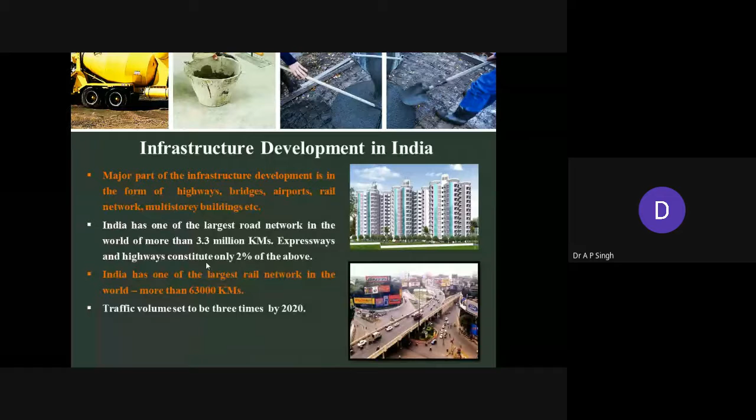India has one of the largest rail networks in the world, more than 63,000 kilometers, and still more work is to be done. Traffic volume is set to be trebling in the coming years, up to beyond 2020.

Now we need to bridge infrastructure gaps to sustain economic growth. In infrastructure development, concrete is the predominant construction material, the other being steel. But still steel is lesser used, and we have more concrete, more reinforced concrete elements in buildings. A major share of the infrastructure development is in the form of concrete structures.

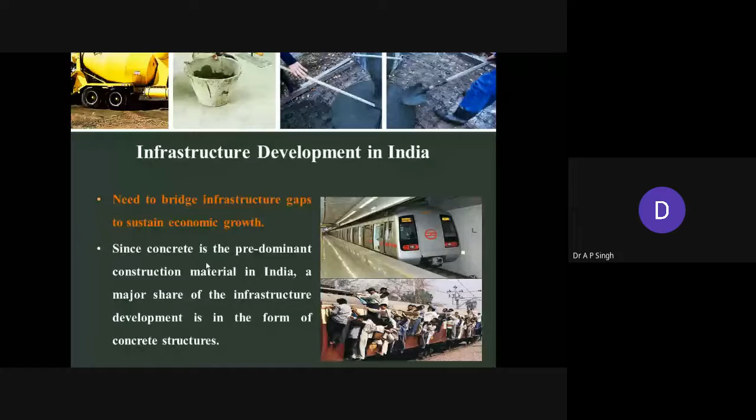Construction industry in India constitutes around 40 to 50% of the capital expenditure in India on projects in various sectors. The total size of Indian construction industry is estimated to be 50,000 million USD and is growing at an annual rate of 7 to 8%, which is expected to pick up.

India has the second largest construction industry in Asia after China, and still more progress is expected after this pandemic, and some major activity is likely to be shifted to India. For that, more infrastructure projects will be coming up. Over 40,000 construction companies are registered with construction industry associations across the country. Construction industry has mainly small contractors, companies, and a few large corporates.

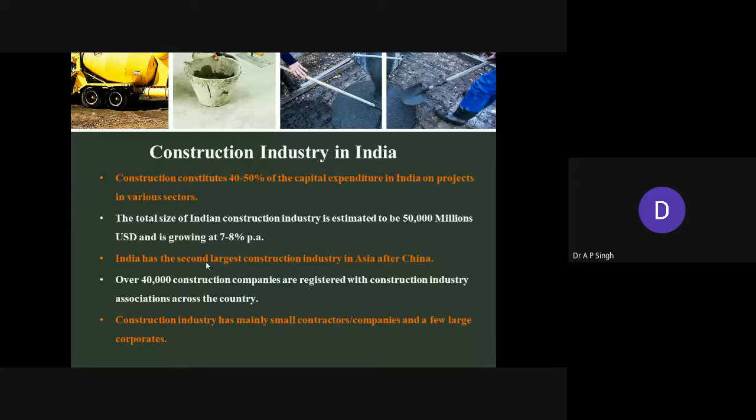Concrete is the world's most versatile, durable, and reliable construction material. It is the most widely used construction material because structural steel construction is relatively expensive.

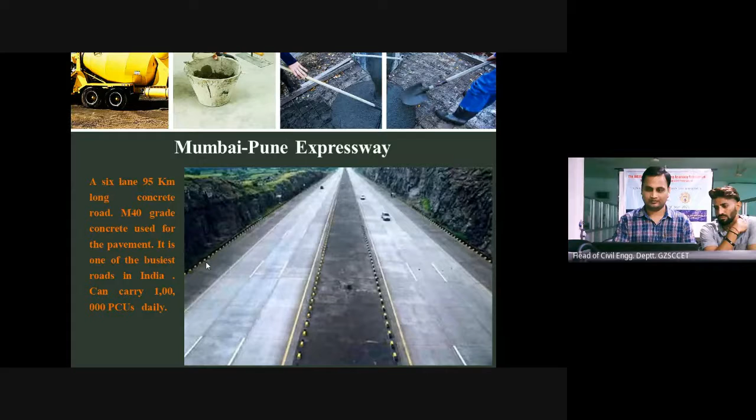This is a 95-kilometer long concrete road. It passes through plain as well as hilly terrain and many tunnels. It's one of the busiest roads in India and has a capacity of carrying up to 1 lakh passenger car units daily. Presently, it is carrying around 50,000 passenger car units daily.

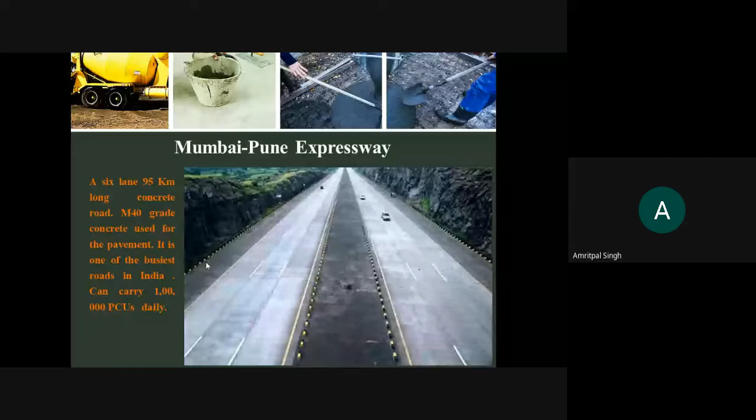Another one is the Exhibition Center in National Academy of Construction, Hyderabad.

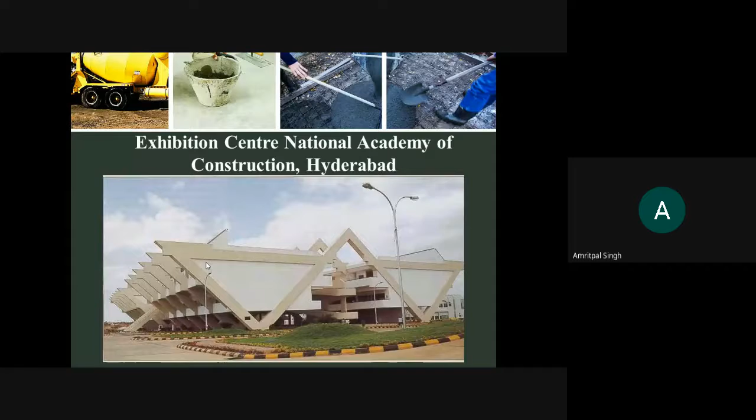Now, when we are talking of self-compacted concrete, I'll just try to define the compaction of concrete, and what is self-compacted concrete, and why do we need self-compacted concrete.

The first slide is on compaction of concrete. Compaction of concrete can be defined as the process of elimination of entrapped air from freshly placed concrete. This results in significant increase in strength and durability, two of the most important aspects considered for concrete.

If the concrete is not well compacted, it leads to porous and segregated concrete, and a lot of air is entrapped in it. It has been established by research that a mere 10% entrapped air results in a 50% reduction in the strength of concrete as compared to that of fully compacted concrete.

Compaction, in addition to increasing the strength, also leads to better even distribution of pores, which will lead to reduced permeability.

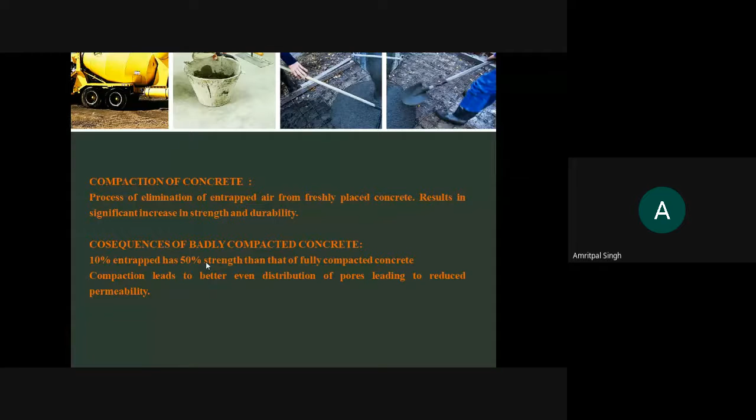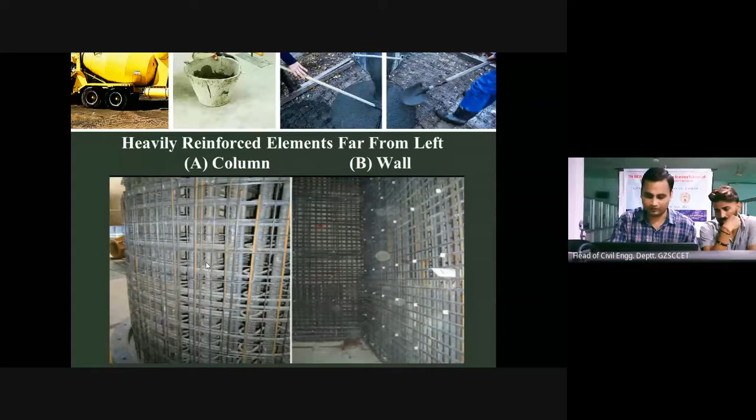Sir, better stop and rejoin again. There was a problem in the net, it's getting obstructed again and again. I'm sorry for that, but I'll rejoin as soon as possible and go ahead with this. Okay sir, you can proceed. I'm sorry the net is getting obstructed again and I have to rejoin every time, but I'll be doing it, and I regret the inconvenience. But it's like that.

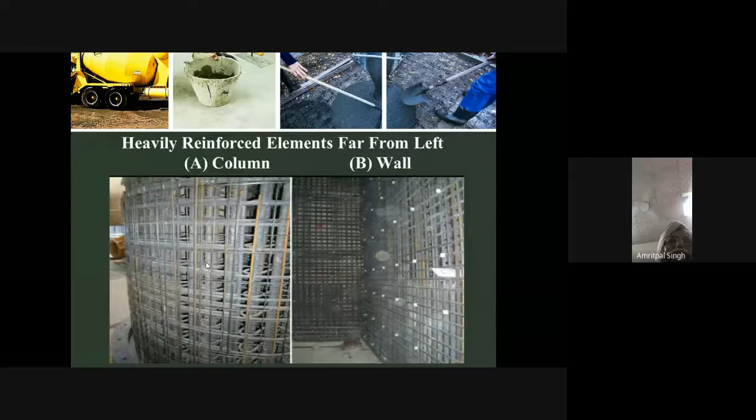Now, the necessity of self-compacting concrete: we need it because in columns, joints, or places where high strength is required, compaction is not possible. Otherwise, vibration leads to excessive vibration, which also leads to some problems. So we go in for a concrete which compacts itself under its own weight.

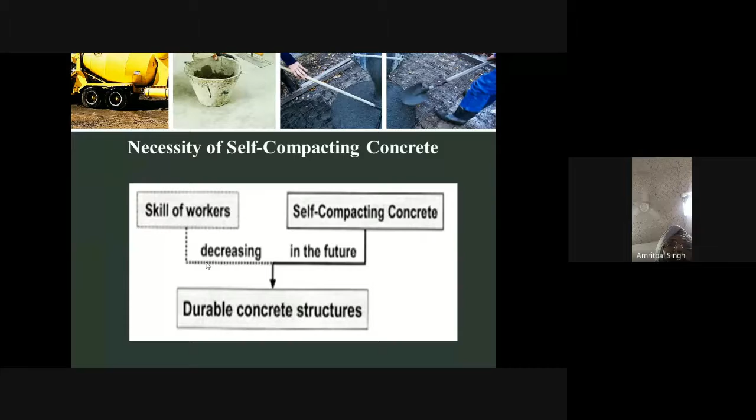Now, self-compacting concrete is a new specialized concrete. It compacts under its own weight and fills all the corners of the formwork, even in congested reinforcement areas like in shear walls and in joints of beam columns.

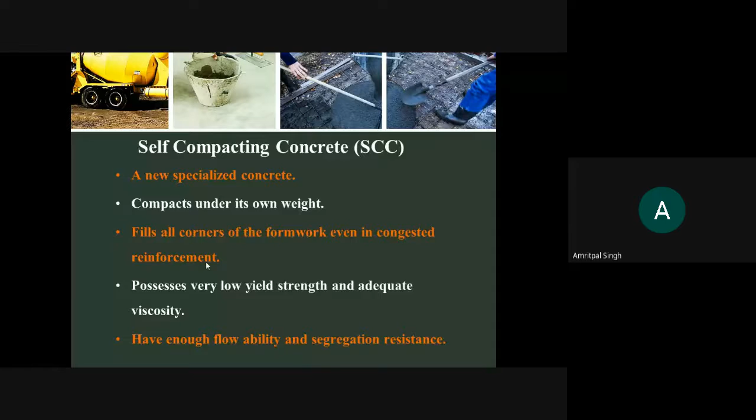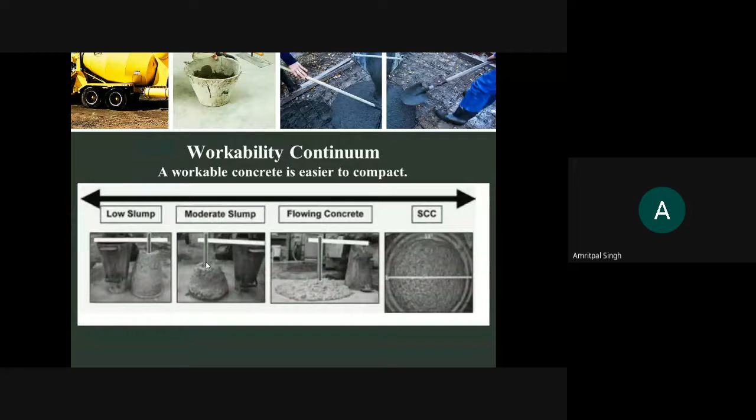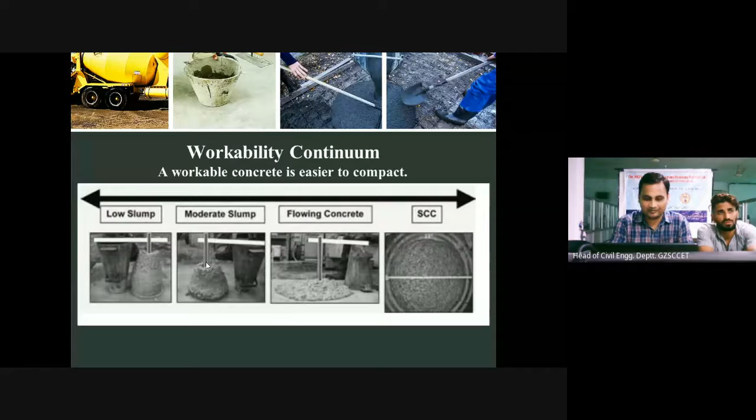Again sir, voice is not audible. Sir, your voice is not audible to the audience.

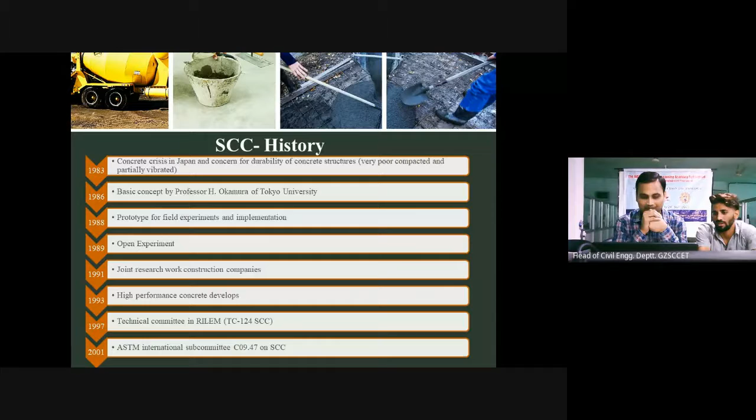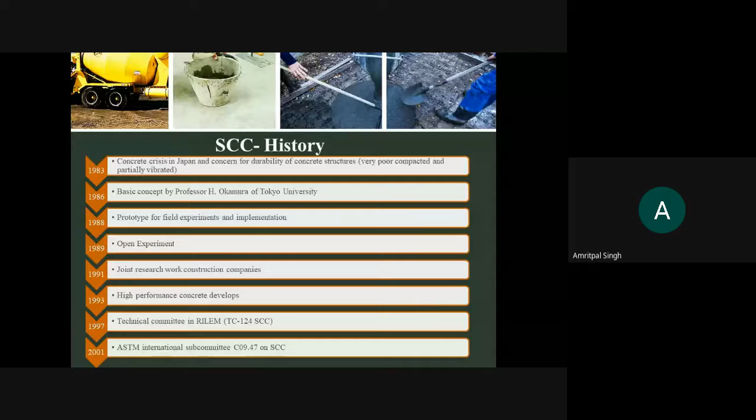In 1983, concern arose for durability of concrete structures that were very poorly compacted and partially vibrated. Then Professor H. Okamura of Tokyo University developed the basic concept. In 1988, prototypes were made for field experiments and implementation. In 1989, open experiments took place. In 1991, joint research work was done with construction companies. Then various developments took place in the years 1993, 1997, 2001, and so on, still carrying on in this field.

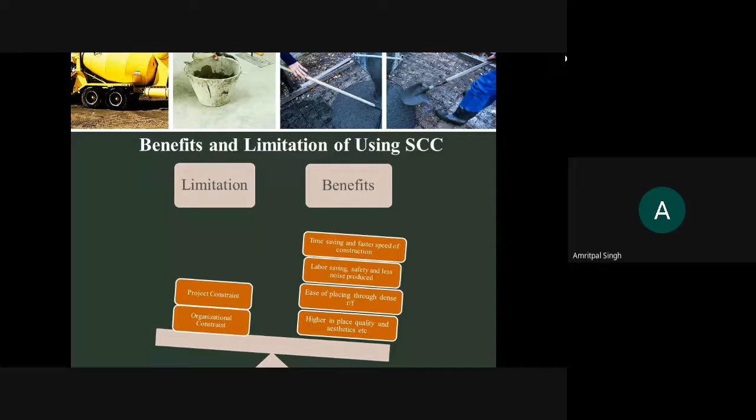Similarly in structures like sport stadia, lecture halls, or cinemas where we have rising seats, this problem of flowability of SCC creates problems. We also have organizational constraints which concern the concrete producer and the contractor, and lack of skilled labor is one constraint.

Then proportioning of material: ordinary concrete versus self-compacting concrete. In ordinary concrete, we have cement, sand, gravel, water, and plasticizer.

In SCC, in addition to cement, sand, gravel, and water, we also need chemical admixtures like fly ash, rice husk ash, or silica fume, and we need plasticizers and thickeners. That is the difference between proportioning of material for ordinary concrete and self-compacting concrete.

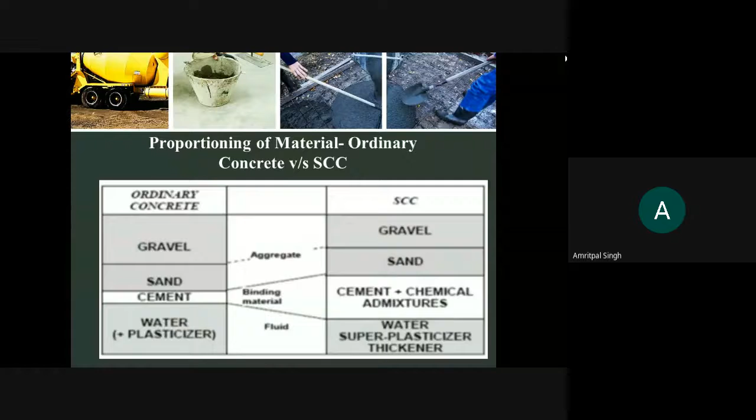In self-compacting concrete, the requirements are: high volume of paste, high volume of fines lesser than 80 microns, high doses of super plasticizer, use of viscosity modifying agents, lesser coarse aggregate, and we need admixtures.

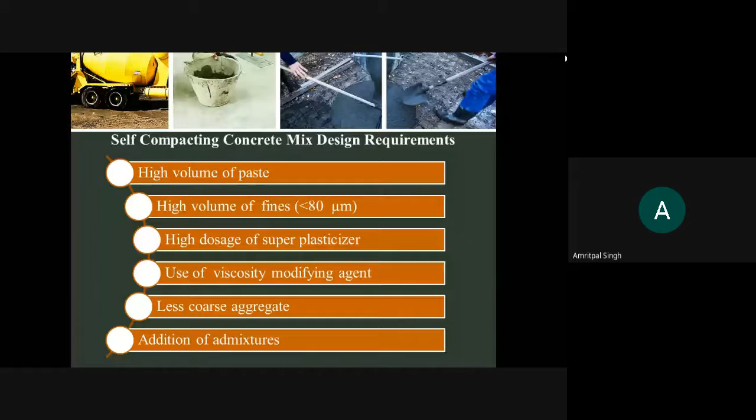The mechanism of achieving self-compaction: reduction of water to binder ratio, limitation of coarse aggregate and its maximum size, addition of mineral admixture, use of super plasticizer and VMA.

The addition of mineral admixture and use of super plasticizer leads to high deformability of mortar and concrete. The first three—reduction of water to binder ratio, limitation and reduction in quantity of coarse aggregates, and limiting its maximum size, and addition of...

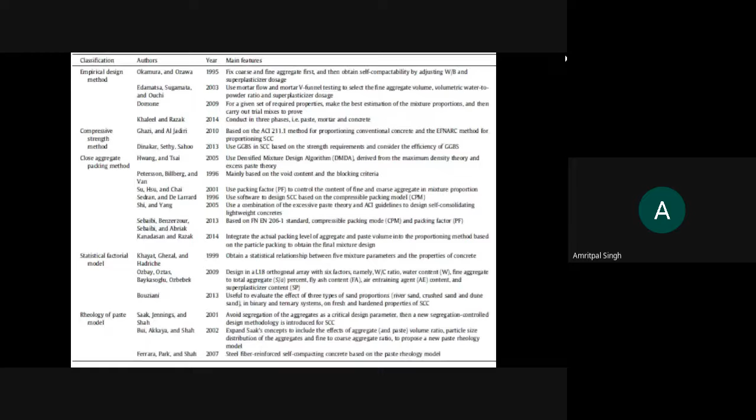Sir, again you are not audible. Hello sir. AP Singh sir ji, you are not audible.

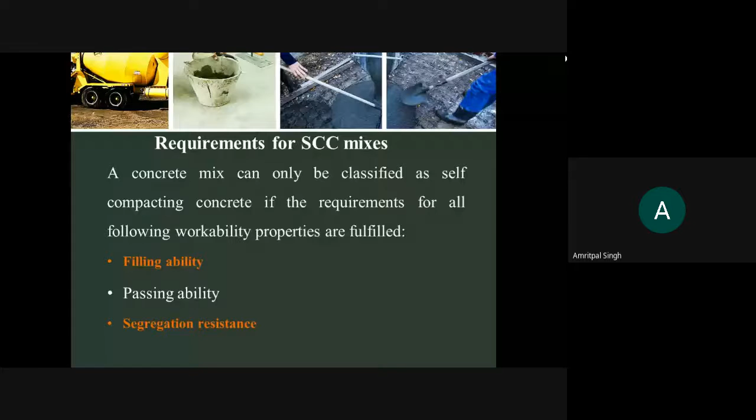Sir, again you are not audible. Sir, please check your connection.

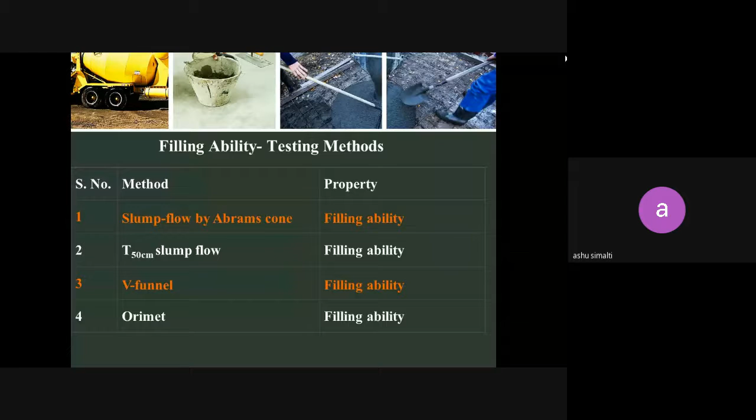Which we use for filling ability. I'm speaking from another mobile. First is slump flow by Abrams cone, T50 slump flow, V funnel method, and Orimet method. These are the four methods which are used for testing the filling ability of the self-compacted concrete.

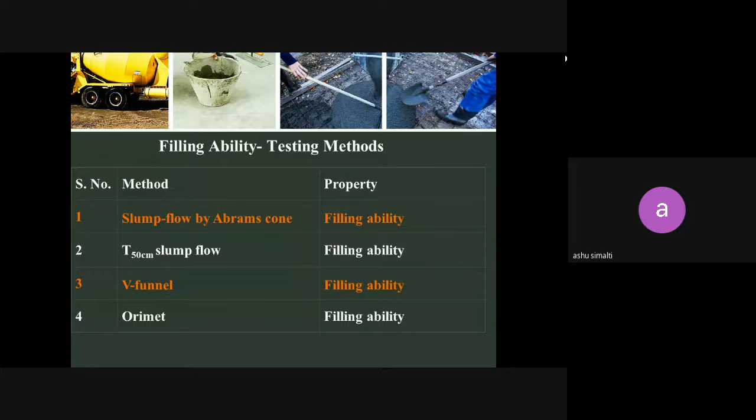Slump flow by Abrams cone and T50 centimeter.

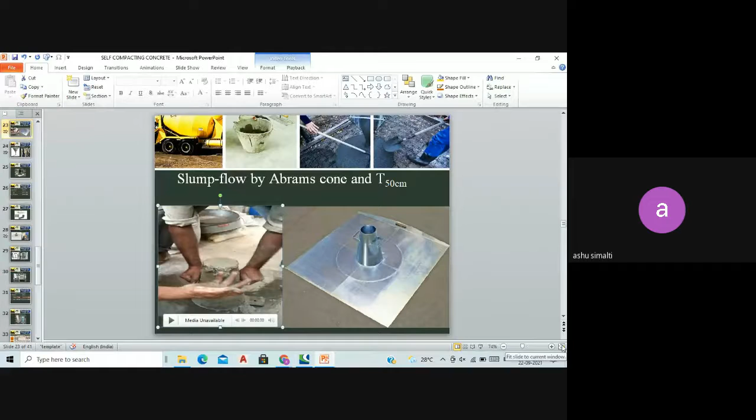This is a cone which is filled with concrete, and we lift it up, and we have a circle of 500 diameter, and it has to spread over this circle, and the time taken to spread over this circle of 500 diameter is known as T50 centimeter or T500 time, and it should pass the limits prescribed to be classified as a self-compacting concrete.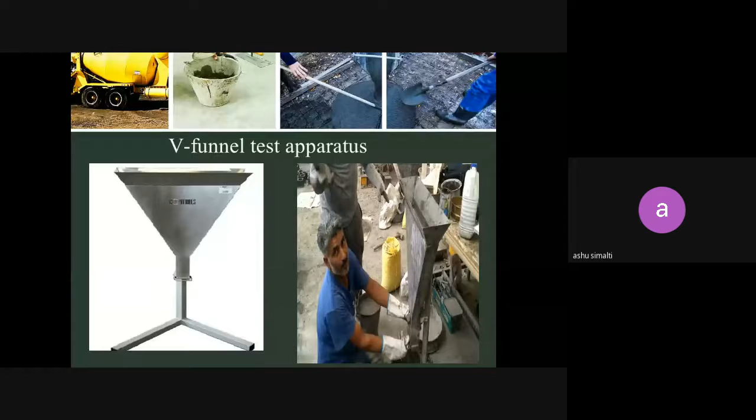This is the third test, that's Orimet test, and as the figure shows, it's self-explanatory. It's filled from the top, and the gate is open. It is kept there for... okay.

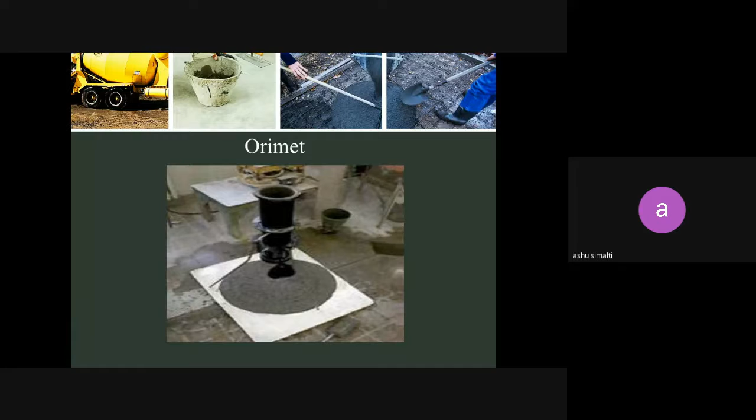Then we have got passing ability testing methods. There are four methods: J ring, L box, U box, and fill box test.

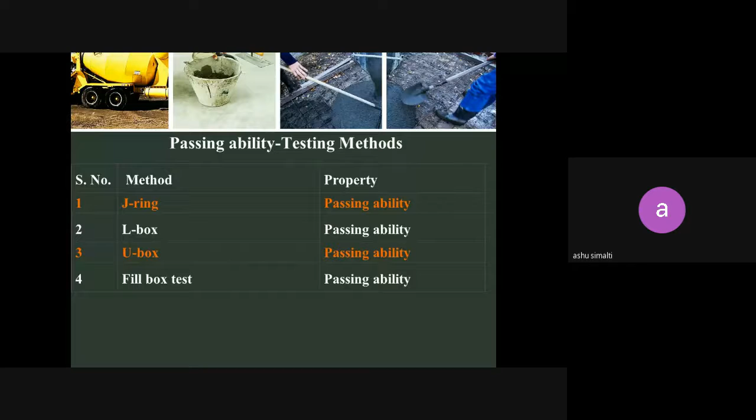This is the L box test, and we fill the concrete in the box, and it flows, and then we determine and measure the heights H1 and H2. The ratio of height H2 to H1 should be less than 1.

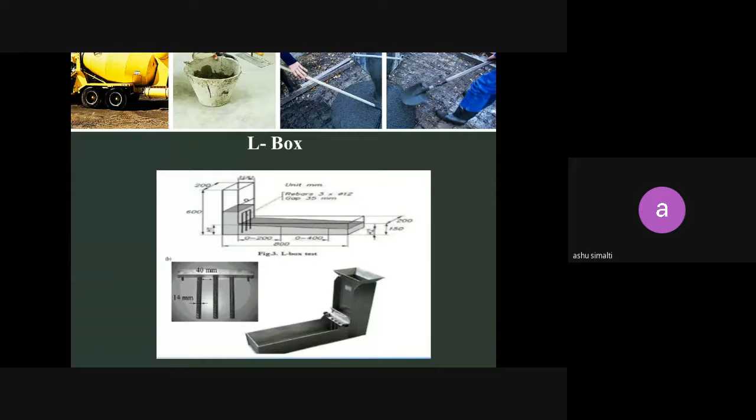This is the J ring test. Again, these are all filling flowability tests, and we fill the concrete and remove the cone, and then we see the spread, measure the time, and see the distance to which they can go.

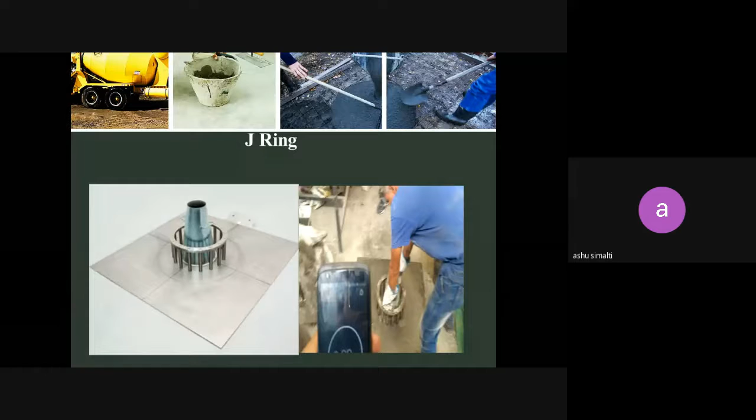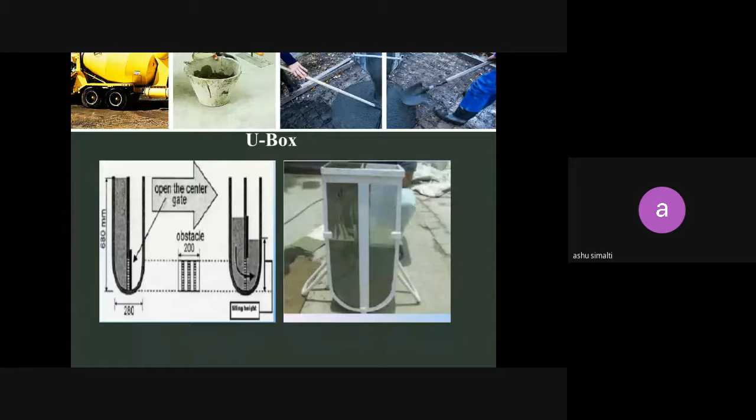This is the U box, and this is the U box test, and the next is the fill box test.

Then we have got the third, stability testing methods, which test whether the mix is segregating or bleeding. We have got column segregation test. We have got V funnel at 5 minutes test. We have got GTM screen stability test, and we have got visual stability index.

This is the column segregation test.

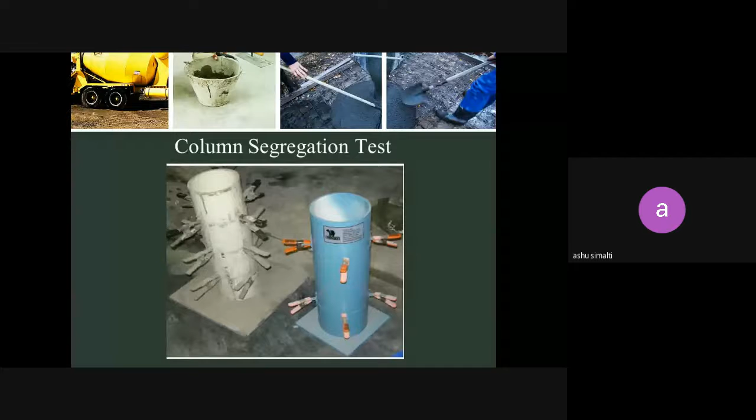V funnel test, we have already seen earlier. There the concrete is put in the funnel and kept there for 5 minutes, and then we let it flow and see whether the aggregates have segregated or not.

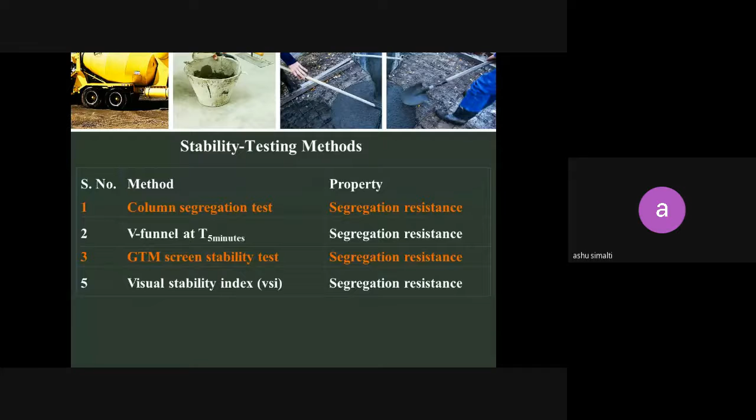Now, influence of material characteristics and proportioning on fresh properties. Number one is powder, filling ability. Powder, that is the binding material, how it affects the filling ability, passing ability, and stability. Powder binding material gives packing density; particle shape and reactivity of powder combination used can impact the water or admixture demand.

Minimal to no impact on passing ability, and fineness of the powder will impact bleeding characterization and viscosity. Viscosity level will affect aggregate settlement.

Then we have the second constituent, that is the aggregate. Optimum packing density and more rounded particles will increase the filling ability. More angular particle shape will reduce the ability of concrete particles to rearrange their relative position while flowing through a restricted space, whereas smaller particles will flow through the spaces more easily. Smaller particles will have lower tendency to settle and segregate. Higher fine content will reduce segregation and bleeding. High range water reducer increases the flowability of the paste fraction of the concrete mix.

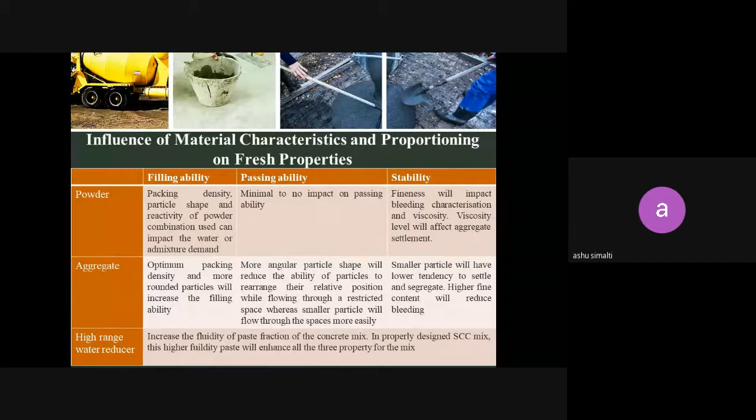In a properly designed SCC mix, the higher fluidity paste will enhance all three properties of the mix. Within a reasonable water powder range, an increase in powder content will increase the paste volume and paste viscosity, enhancing the filling ability, passing ability, and stability of an SCC mixture.

Too great an increase in powder without an increase in water can lead to mixtures with viscosities that are too high, resulting in reduced filling and passing abilities.

Too high an aggregate volume relative to the paste volume will decrease filling ability. Too high a concentration of larger particle sizes will cause blocking and reduce passing ability. The concentration is governed by the particle size distribution and mixture proportions together. Higher fine aggregate contents will reduce bleeding and aggregate settlement.

With high range water reducers, the increased water increases the paste volume and the filling ability, as long as no segregation is occurring. In some instances, increase in water can increase the passing ability by improving the filling ability. Too high a level of water can increase bleed and instability.

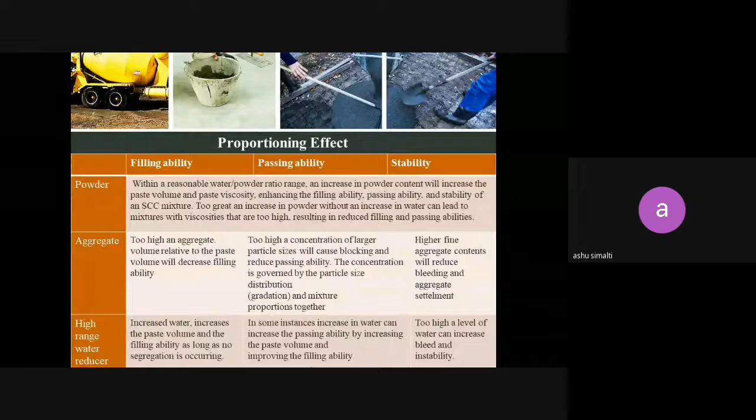This just shows a flow diagram: cement added, mineral additions, fine aggregate, coarse aggregate, dry mixing for 5 seconds. Then we add water, mixing for 2 minutes, followed by a pause of 1 minute for false set. Then we add super plasticizer.

Again mixing for 2 minutes, measurement of slump flow, then remixing, addition of VMA, then remixing. Then we perform all the tests which we have just discussed: slump flow, V funnel, U box, L box, fill box test, etc., and other stability tests. If it qualifies all these, then we say it's self-compacting. If it fails even one of these tests, it will cause remixing and then adjustments, and repeating the procedure all over again.

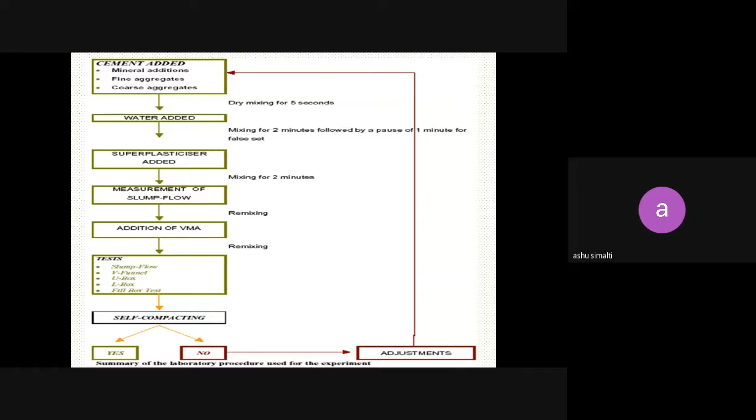These are the limits prescribed by different codes for those test values. Slump flow by Abrams cone: minimum unit is mm, minimum 650, maximum 800. T50 centimeter slump flow measured in seconds: minimum 2 seconds, maximum 5.

J ring, again in mm, minimum 0, maximum 10. If it exceeds 10, it has to be repeated. V funnel, again in seconds, minimum 6, maximum 12. V funnel at 5 minutes, 0 to 3. L box, H2 by H1, 0.8 minimum and 1 maximum; more than 1, again repetition.

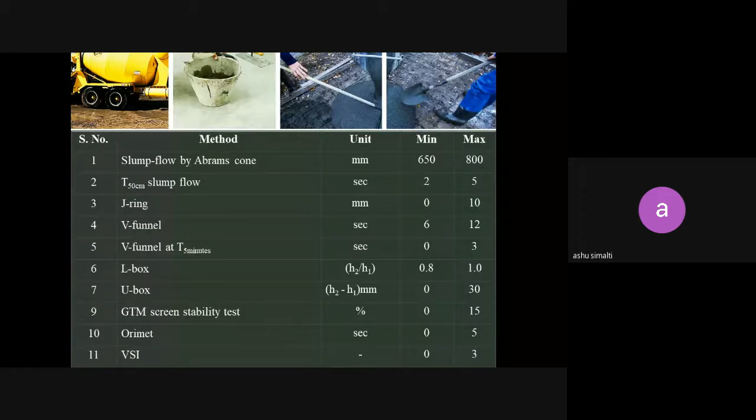U box, H2 minus H1 is 0 to 30. GTM screen, 0 to 15. Orimet, 0 to 5 seconds. And visual stability index is normally 0, 1, 2, 3.

This graph shows the market in billions of US dollars in year 2021 in the different parts of the world: Latin America, North America, Europe, Asia Pacific, Middle East, and Africa. A lot of development is occurring in Middle East, Africa, and Asia Pacific, so the consumption there is more, and it is increasing at a rate of around 6%.

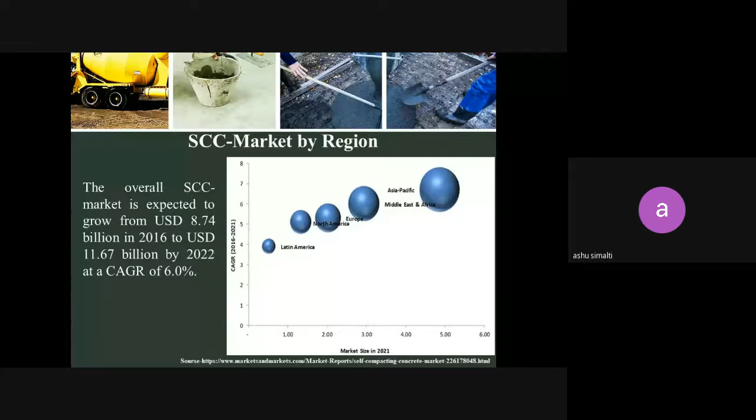Then we have got some special self-compacting concretes like high strength self-compacting concrete and, for special applications, lightweight self-compacting concrete, heavyweight self-compacting concrete. Steel fiber reinforced concrete is also becoming very popular, and now steel fiber reinforced self-compacting concrete is also gaining popularity. We have rubberized, and recycled aggregate self-compacting concrete.

Nano SCC with nanoparticles, pre-placed aggregates with mortar, ultra high performance self-compacting concrete, rock-filled concrete self-compacting concrete, SIFCON, SC slurry infiltrated fiber concrete, high performance fibers, underwater self-compacting concrete, self-leveling concrete, and self-compacting mortars.